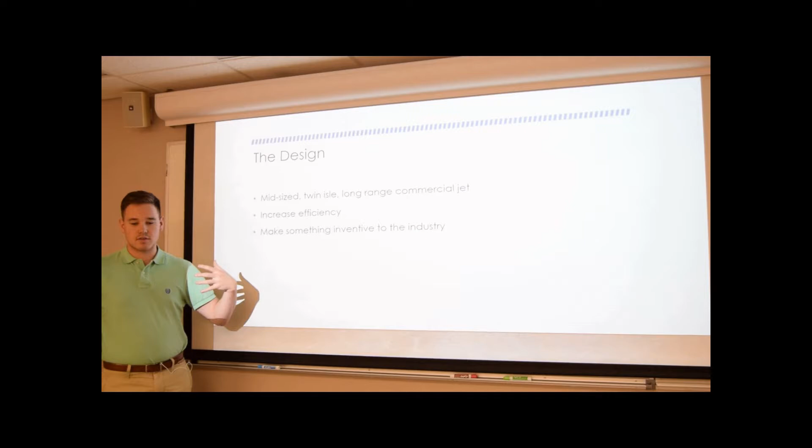The main design of this aircraft has super long wings. It's made mainly of composites such as carbon fiber, which reduces a lot of weight. The design intent is a mid-sized jet that's not too awfully big like the A380, but has a long range because it's a lighter aircraft, increased efficiency, and it's something inventive. It's something new to the industry, making planes out of composite instead of aluminum. It's the next step into the future with commercial jets.

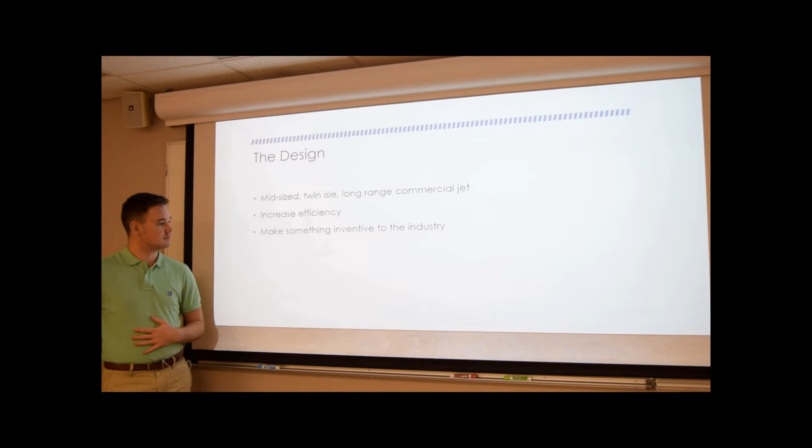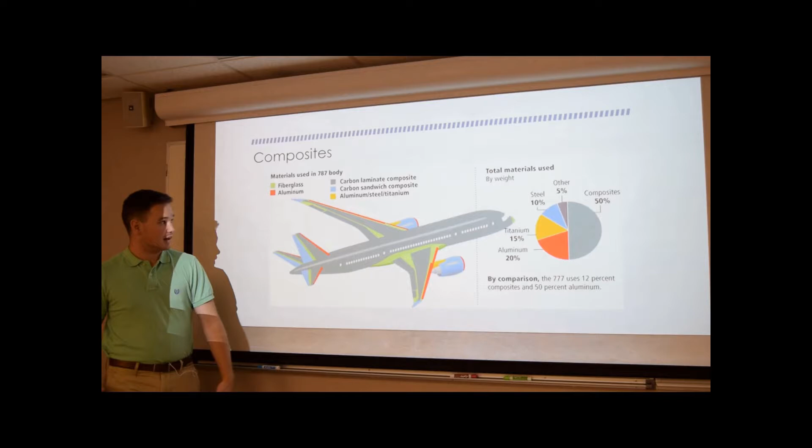As you can see, just to look at how much composites there are, over half of the airplane is composites. That includes 90% of the fuselage and the wings, and really the only thing that's metal is your leading edges and where your engines are, and that's just for heating purposes. That's the buildup of this plane and what the idea all started from.

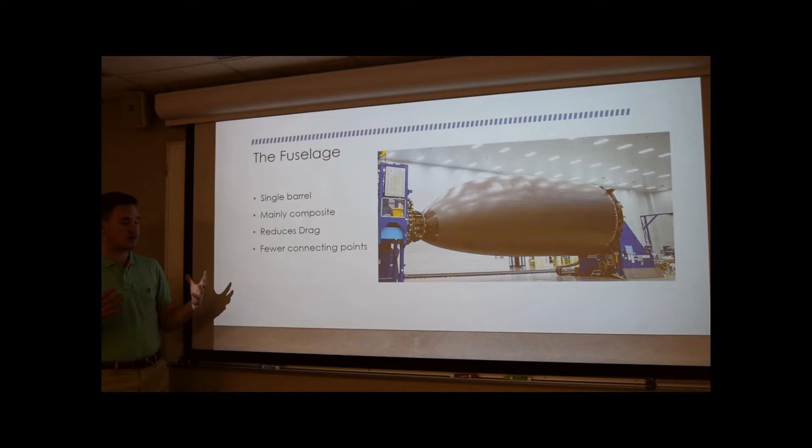The fuselage was one of the biggest parts of the aircraft, entire carbon fiber going all the way through to the center, so they had to develop new ways to create this. With carbon fiber, you don't have all these rivets and bend points like you do with aluminum.

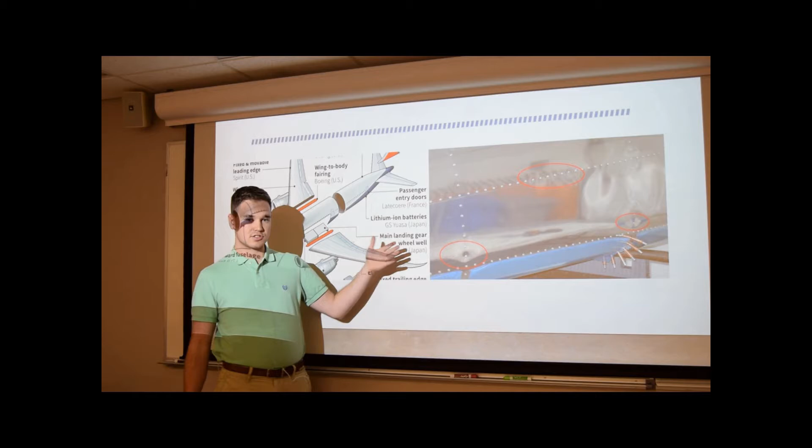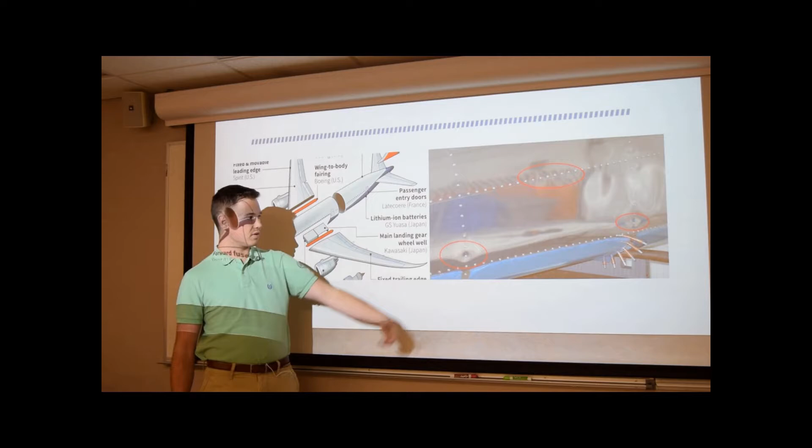With aluminum, you're going to have these bend points here. As you can see, there's a divot there, and that messes up the laminar flow of the air going over it, which increases drag. When you have nothing but carbon fiber and you're not having these points riveted together, you don't mess up laminar flow from the rivets being there, or from the divots where the rivets push against the metal. You're also reducing a lot of induced drag as well as parasite drag because you're not having to have rivets - you have 20,000 to 30,000 fewer rivets, which amounts to about 600 pounds per flight.

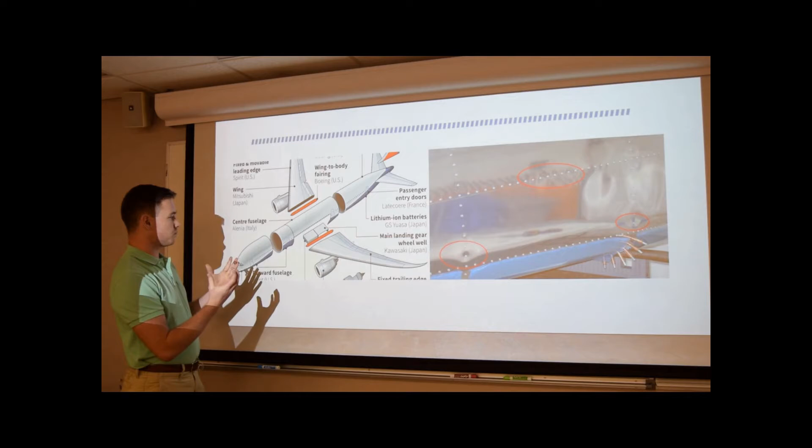So that's a lot of efficiency and savings. With most newer aircraft, they usually have 5 to 6 sections for an aircraft this size. With carbon fiber, you only need 4 - 1, 2, 3, and 4. This means fewer joints, which means it's faster to put together. It means you need less material weight-wise to keep the airplane together, which is very efficient with your induced drag needed for lift.

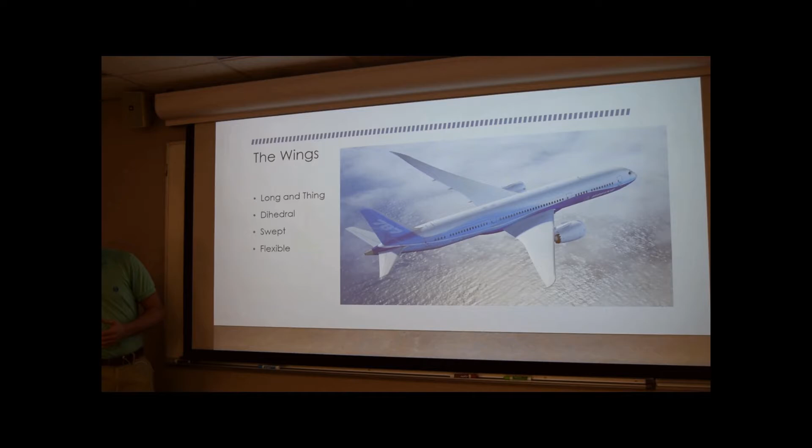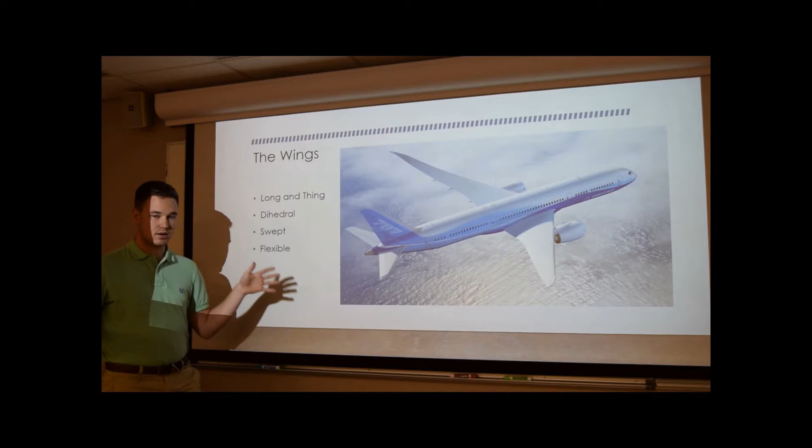The wings are my favorite part of this aircraft and what makes the Dreamliner the Dreamliner. The wings are very long and very thin. They're dihedral, meaning the wingtips are higher than at the root, which increases lateral stability. They're also swept back and very flexible.

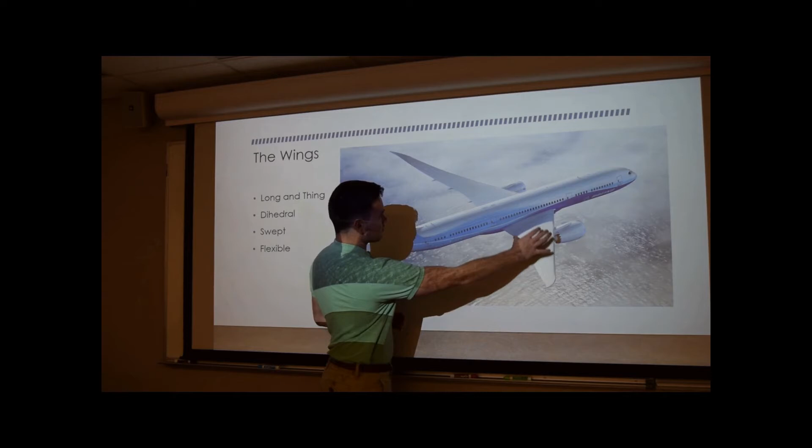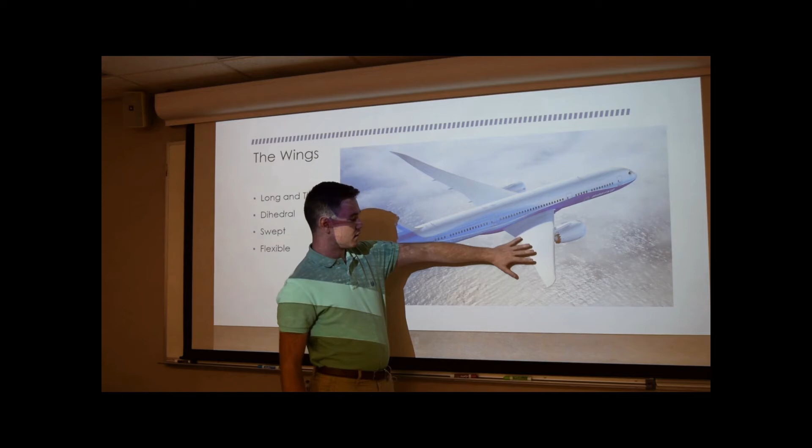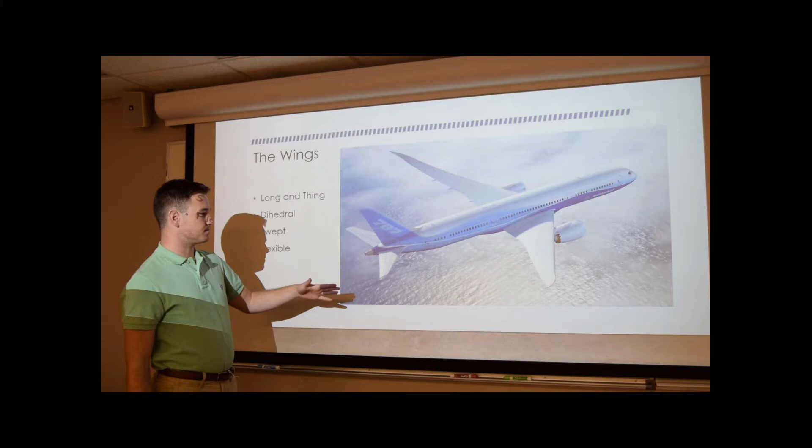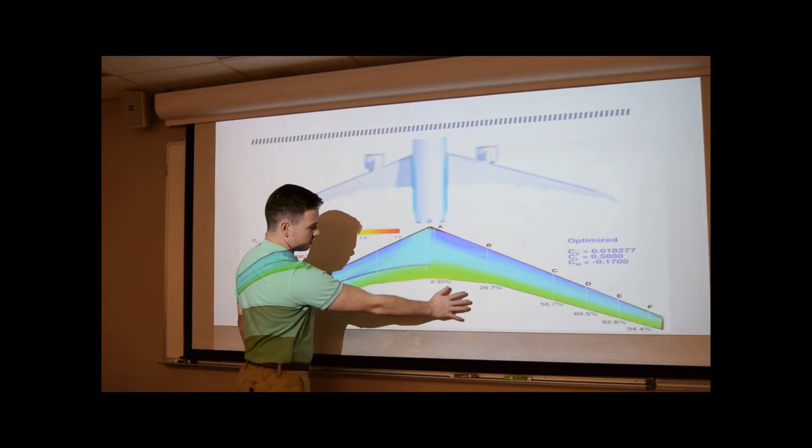They are swept, and this really just reduces drag while increasing lift. As you can see in the next slide, see how much drag is created - this isn't the exact wing but one with a similar style. A lot of the drag here, the dark blue, is from all the lift that needs to be created, and as it goes down the wingtip, most of the drag is right here in this area. This is where most of your lift is being created, and then it cuts off as you get closer to the wingtip.

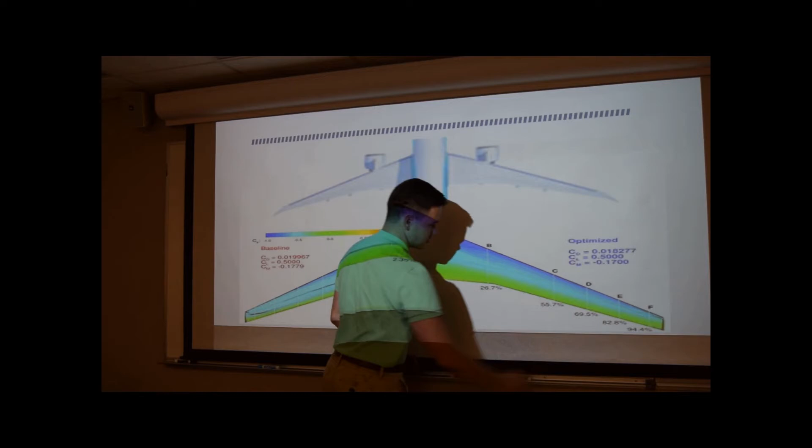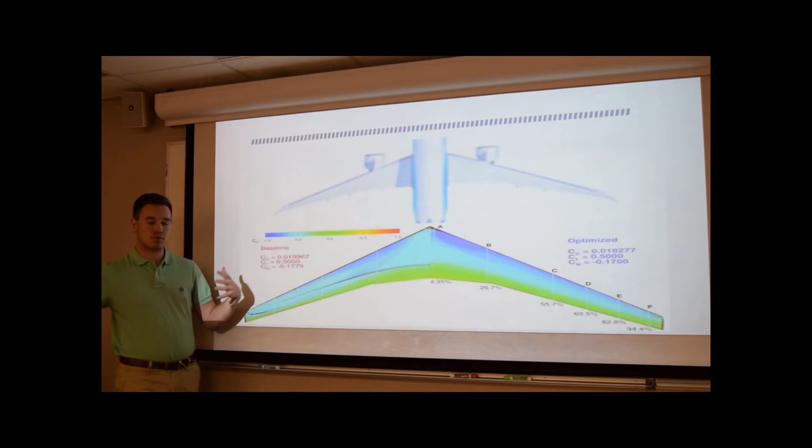That makes a very efficient wing, and it's a very efficient style for the speed they're going at, which is around Mach 0.85. Mach 0.9 is the fastest that they're able to go, and actually the fastest in the industry.

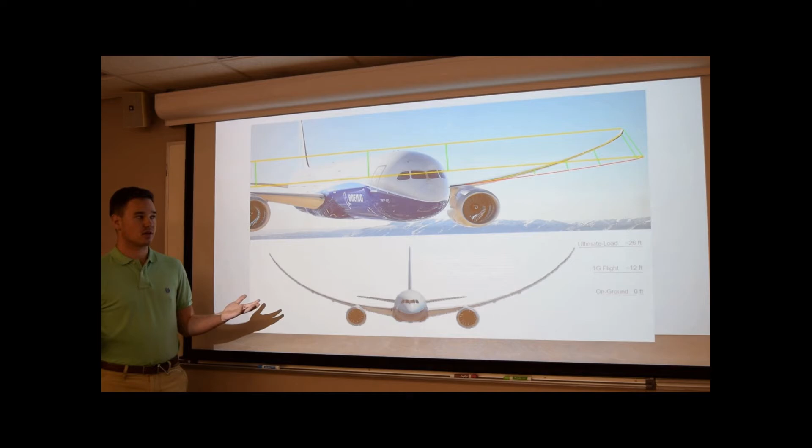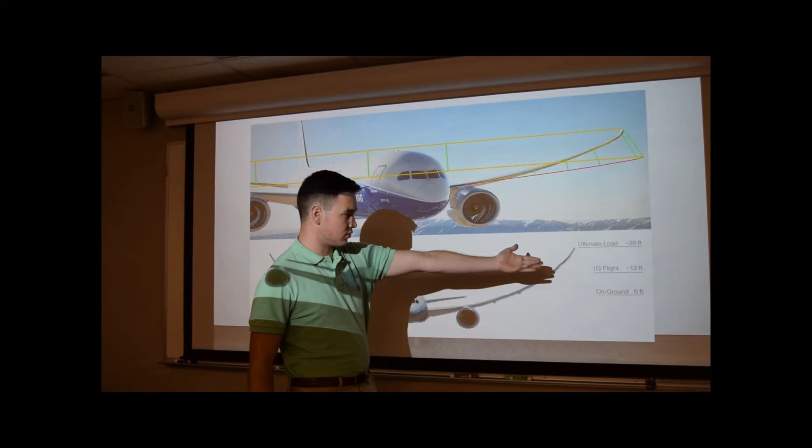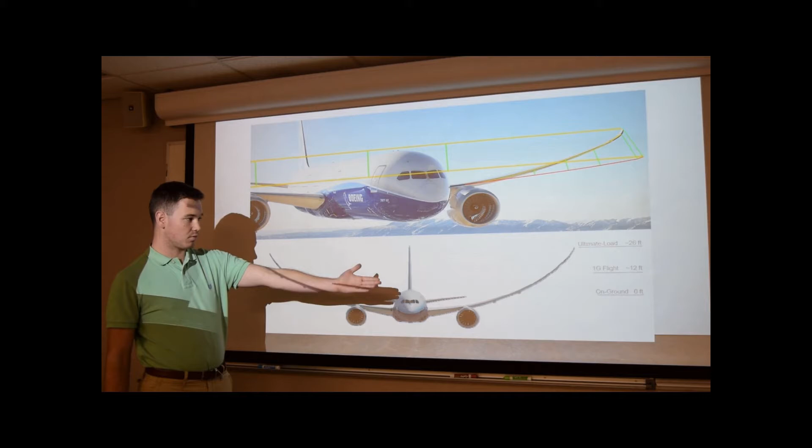So the wing flex is one of the most iconic things of this aircraft, mainly because it's made of carbon fiber, so it's more flexible than aluminum and other metals. You can see here just how far up this wing is bending up from where it should be. When they were doing testing, 1G is about 12 feet in the air, which is an insane amount. If you compare it to the 767, which this replaces, the wings would maybe go up 5 to 6 feet, but this one goes up double and has been tested up to 26 feet, which is higher than you might even be able to see out of the windows.

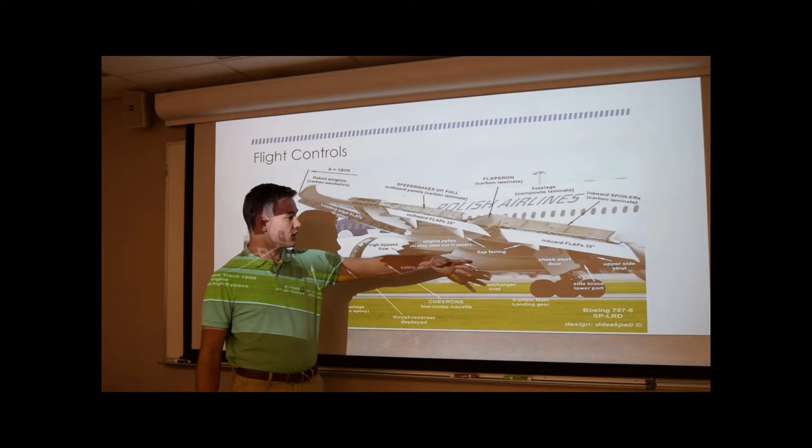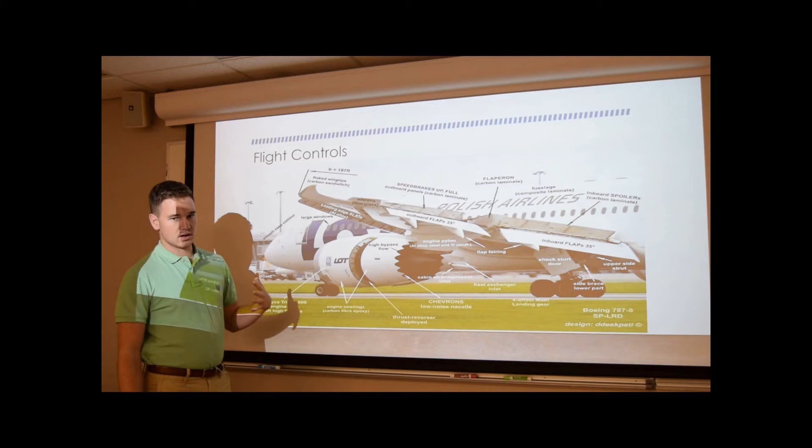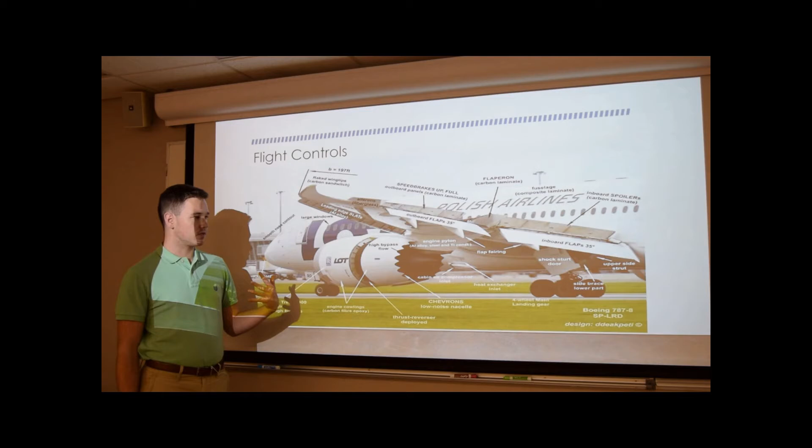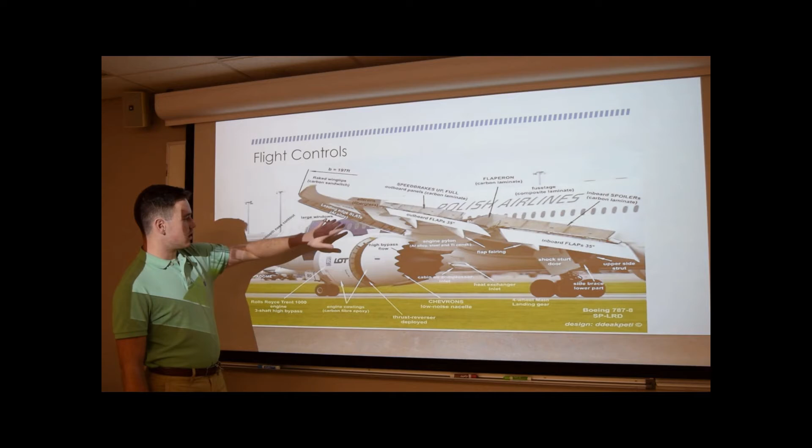With controlling the aircraft, this is a very, very complex wing design. It has a lot of slats, ailerons, flaps, and even a flaperon, and this system is fly-by-wire for Boeing. So really you aren't flying the plane, the computer is. Normally when we think of flight controls, we think of ailerons, elevator, rudder, and trim tab, but this aircraft uses almost every single flaperon and slat to fly the aircraft, to make it more efficient. That's what the entire design of this plane is meant to do. If you see videos of this plane flying, you'll see the ailerons come up and down, and the flaps mainly come down for landings and takeoffs. But when you see rolls and banks, you actually see some of the spoilers and speed brakes come up just a little bit, and even the slats come down just a little bit, to make it more efficient with a better turn and a better roll rate.

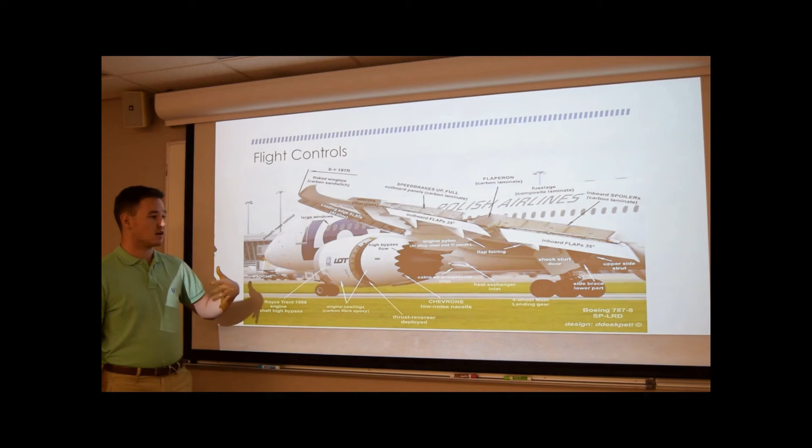This aircraft also has thrust reversers, which allow for a shorter landing distance, a very iconic feature for any jet or turboprop nowadays. The engine is very specific for this aircraft - it's the Rolls-Royce Trent 1000, and GE also makes one. This engine makes over 74,000 pounds of thrust per engine, which is insane. It tops their last engine, which only made up to 63,000, and that was with a heavier aircraft. Now this Dreamliner is a lot lighter and has even more thrust, which makes the performance go crazy high, letting you do a lot more than just going to bigger airports with long strips.

You're able to land at shorter airstrips, take off at shorter airstrips, overall increasing the performance and availability of this aircraft. Another thing, when you look at these flap fairings here, this is usually where they keep the motors. In most aircraft wings they're pretty large, but here they're actually very small, less than half the size of a normal one, which really reduces parasite drag from the wing.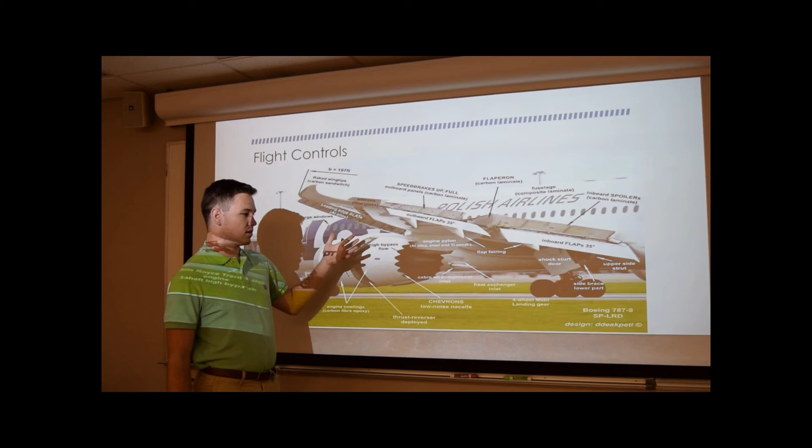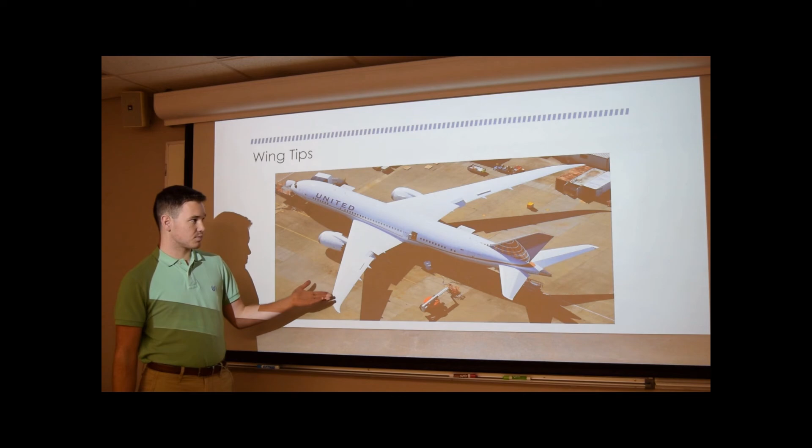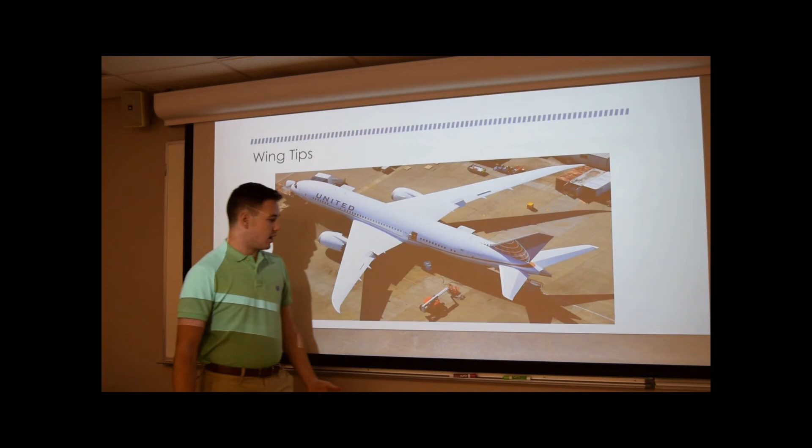Tips - something very iconic about most commercial jets is that they have winglets, which basically try to fix the wingtip vortices created at the wingtip of every aircraft. But what Boeing has done with this aircraft is increase the length of the wings. These are the longest wings for the size of the fuselage and aircraft, which reduces the effect of wingtip vortices the further you go out from the fuselage. So what they did was put a raked wingtip - you see your swept wings coming down, but then it just cuts off. You can even see this in the horizontal stabilizer, it just cuts off. What this does is it doesn't create more lift, but allows the wings to be thinner and lighter because they don't have to hold as much load as wings with a winglet would, since winglets create a lot more load on the wingtip.

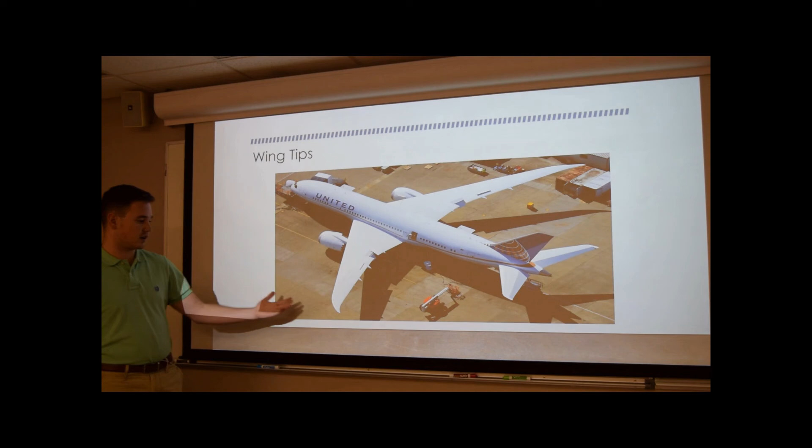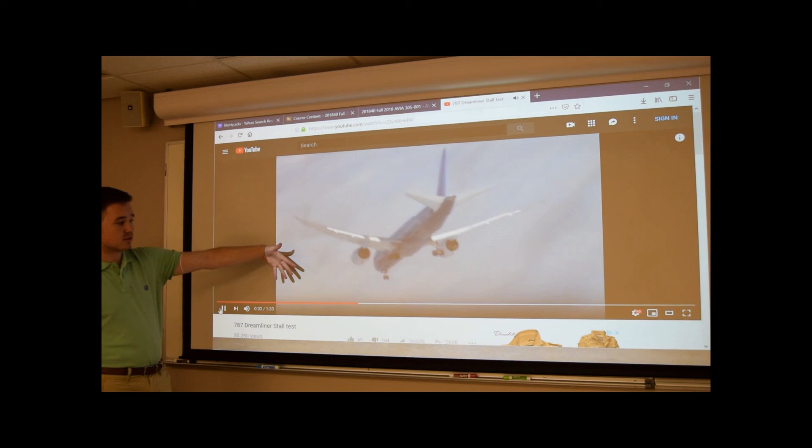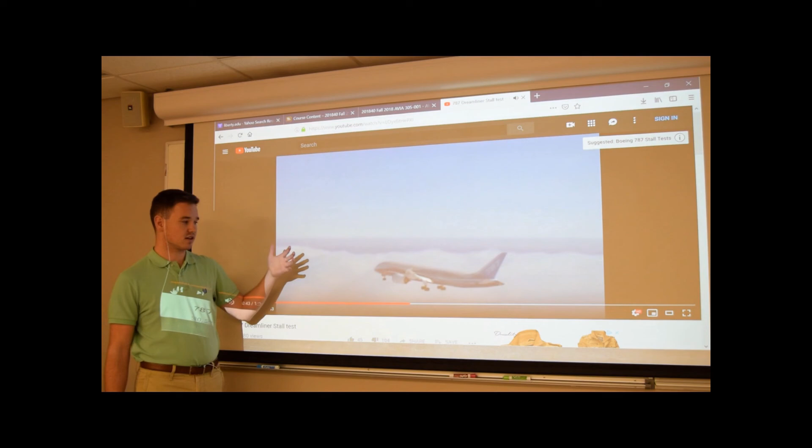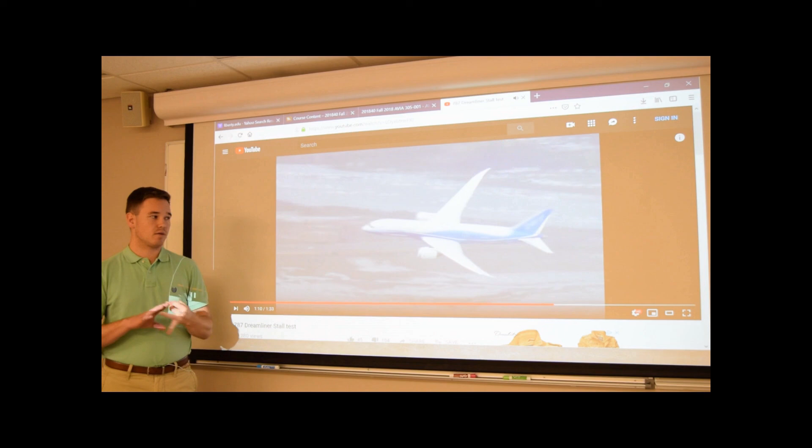This video is just going to basically show how the airplane flies and how it's affected during a stall. As you can see during its flight, the aileron moves, but you also see this thing called the flaperon move and manipulate as well. It's dropped its nose to probably about 20 to 30 degrees, and as you see, it's a pretty fast recovery for a commercial jet - not really a typical characteristic, but with having a lighter body, lighter wings, and an insane amount of thrust, you're able to have a better performing aircraft. As it goes down, you see the flaps, slats, and speed brakes coming out, and also the reverse thrusters coming out, slowing the aircraft down as fast as possible, so you can land at the small airports they want to, and land with heavier weights for a more performing aircraft overall.